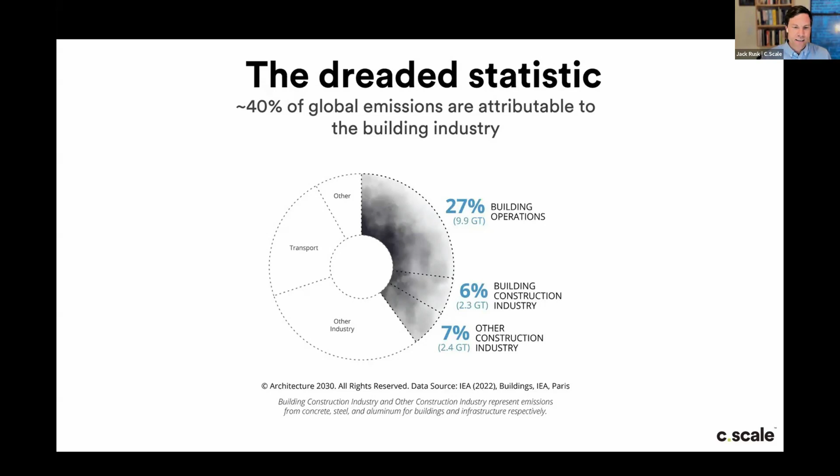And when we look at it, it's just intimidating enough that it's a little hard to approach. What does it mean to take this down to 39%? What can I do? If we're looking for data to drive decisions, these are nice statistics to contextualize what we should focus on. But I argue that maybe statistics like this don't actually help us focus our attention on specific strategies and practices.

Another kind of global statistic that I find really fascinating comes from the UNEP, the global group convened by the UN to look specifically at buildings. And it gives us this other very staggering way of slicing some of the same facts. To reduce emissions from the built environment must happen simultaneously with a growing building stock.

There's all sorts of arguments made, many of which have merit, about building less, about trying to provide for the programmatic requirements of clients with things other than a building. But at the end of the day, it's a little hard to convince a group of architects that they should build less buildings. And that really helps us understand the challenge, which is how do we continue to provide spaces for human thriving, right? While also reducing overall emissions.

And this means that if we're going to build twice as much, say, and reduce emissions to half as much, every building we build, we need to do a little bit better with, especially because not every building is going to get the attention of an architect, least of all one concerned about the environmental impacts of that project.

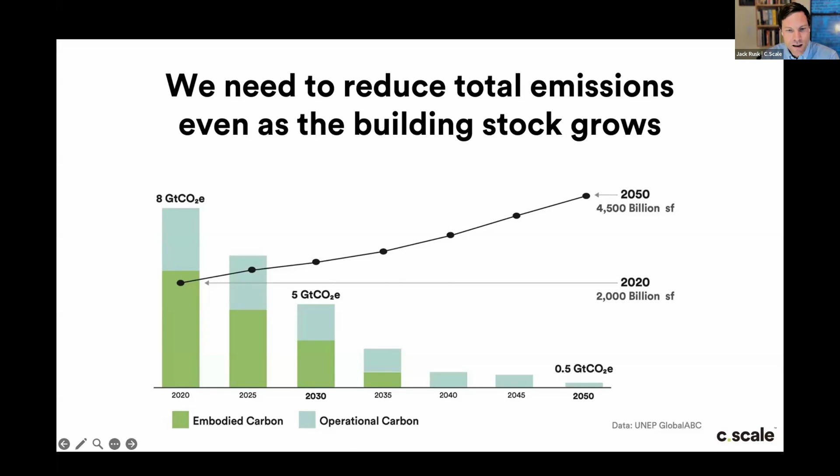Another kind of statistic that sticks out to me in these conversations is this one. This is from a study in, I think, 2020, that the weight of all the stuff moving through the built environment, you see the things here, concrete, aggregate, bricks, masonry, metals and asphalt, now outweighs all life on Earth. It's a strange thing to think about, but it really helps us understand this twin crisis of landscapes and biodiversity together with all the material being processed in the built environment.

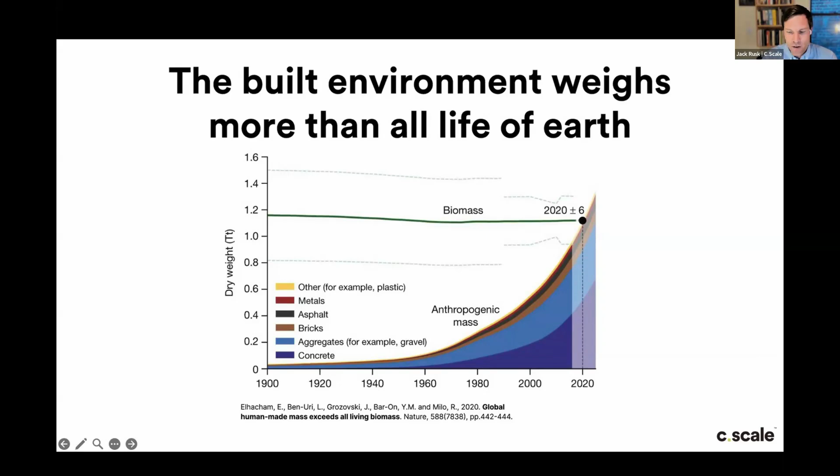And again, another way of slicing the global problem, and one I hope that's a little more palpable to people very aware of the quantities of things like concrete that might go into a building. And all of this obviously is depressing, demoralizing, et cetera, and we could stay up all night feeling bad about it.

But the thing that is really exciting for me at C-Scale, and I think for many folks in the industry, is that designers actually have a very particular and powerful role to play in this whole equation, which is that the procurement spend that comes through architects' hands through things like specifications, which obviously aren't the whole picture, specs get eroded for all sorts of reasons, but really they do move and define markets. And the potential of architects and designers taking climate more seriously is that the immense purchasing power of all those hundreds of small decisions that people make every day has the potential to really do something different.

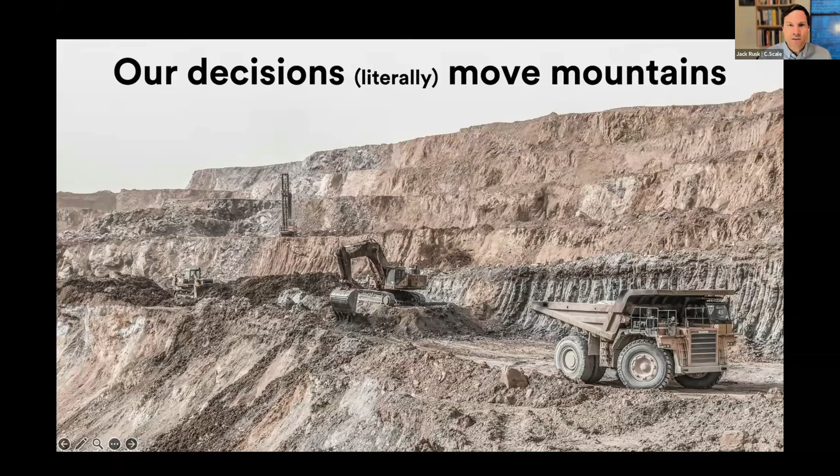On one hand, our decisions move mountains, they contribute to extraction. Some of this is inevitable, and really, I think, a cost worth paying for beautiful and livable cities. But we can also try to make decisions that regenerate forests, that rebuild livelihoods, that repair landscapes. And the trick, obviously, is knowing which decisions contribute to which.

To do that, our work, to bring it home, is life cycle assessment. Life cycle assessment is the tool that helps us tell the difference between things that contribute to environmental well-being and things that degrade it.

And obviously, carbon is only one of many metrics we can look at, and we look to carbon really as an imperfect proxy for a whole host of potential impacts. Like I was mentioning to Paul earlier, we're needing to look at energy use in a building against the procurement of insulation, against the effect that improving the concrete mix might have. And what carbon allows us to do, it has this sort of magic quality, just like currency, of helping us put dissimilar things on a common basis.

And that's why we see carbon assessments as a holistic frame to make these sorts of decisions on building projects, when buildings are many dissimilar materials coming together in complex sequences. To wrangle a lot of that complexity, simplifying assumptions like reducing everything to carbon emissions help us make apples to apples comparisons as we're approaching these decisions.

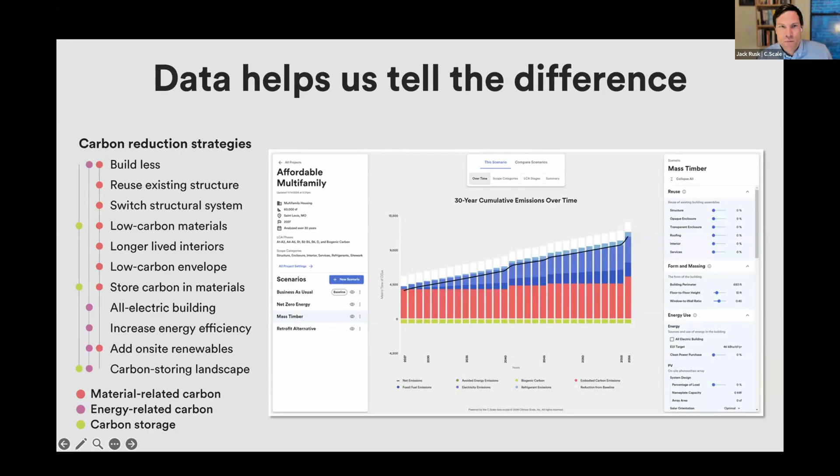This is a project that I worked on in San Francisco a few years ago, a K-12 school, about 100,000 square feet. And this is really the mix between operational and embodied carbon. The grid in California is pretty clean. It's getting cleaner. And we see that most of the emissions from this school are from the embodied emissions. But if I take that school and put it in a crane and swing it over to a couple different cities, we see really different profiles in the distribution of emissions and also the absolute quantity. There's different electricity grids, there's different concrete supply chains. Concrete's an exceptionally regional material, and that changes the balance between operational and embodied carbon.

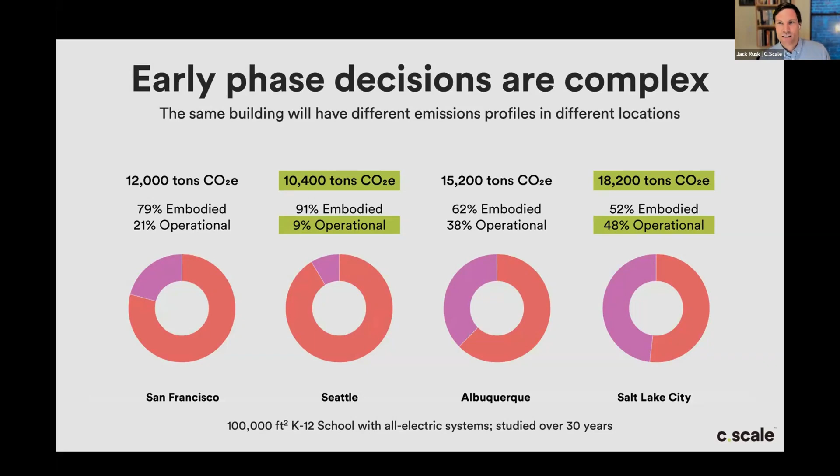And obviously, if you're in one place and you're only doing projects in one town, you might develop a gut feeling for these dynamics. But the reality is that many architects work across geographies, work on many different project types, and need to use data to understand these trade-offs, lest we accidentally make decisions that might be relevant in San Francisco that are not as relevant in a place like Salt Lake.

Another kind of thinking that we hope data helps us avoid is the idea that there might be magic bullet solutions, like the one thing we should always do that works everywhere. So this is continuing that same analogy. Say for that San Francisco school, we put a PV array on it and we get to something that looks like net zero. We generate enough energy in the year to offset all the energy procured from the grid, averaged out over the course of those 12 months.

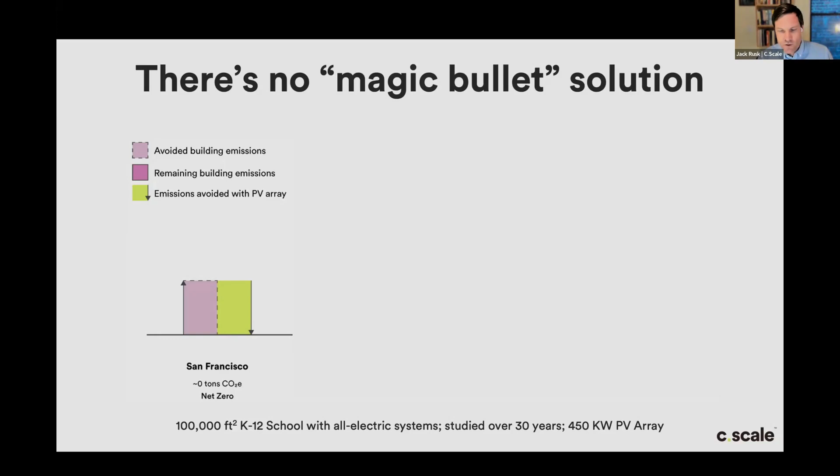Well, if you take again that same PV array and put it in different places, you see really different dynamics. In Seattle, the grid is way cleaner, but PV actually produces much less electricity because it's cloudy all year in Seattle, and we don't get to net zero. In Albuquerque, emissions are much higher, but so is the amount of solar resource. So you get to something that looks like net positive.

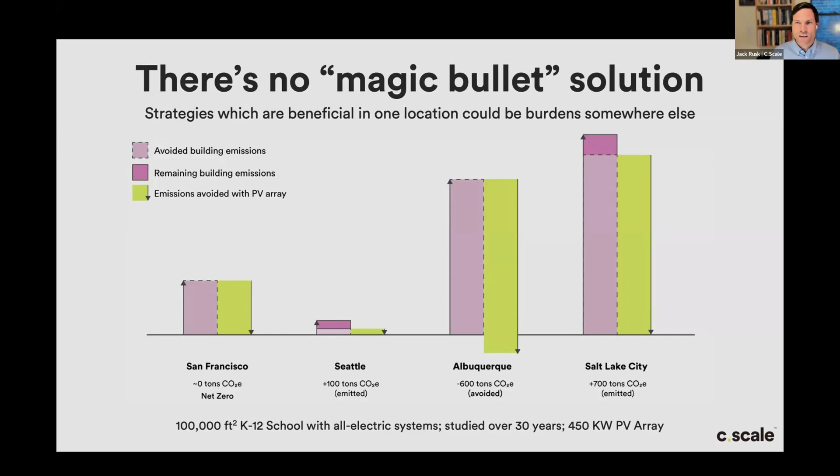And again, these dynamics, which are evident once you start to stack them up and look at the data all together, are not always immediately intuitive. So C-Scale has its roots in the idea of a decision-making tool to help bound out all this complexity, to help project teams focus on solutions that matter. The right data at the right time to support the right decision.

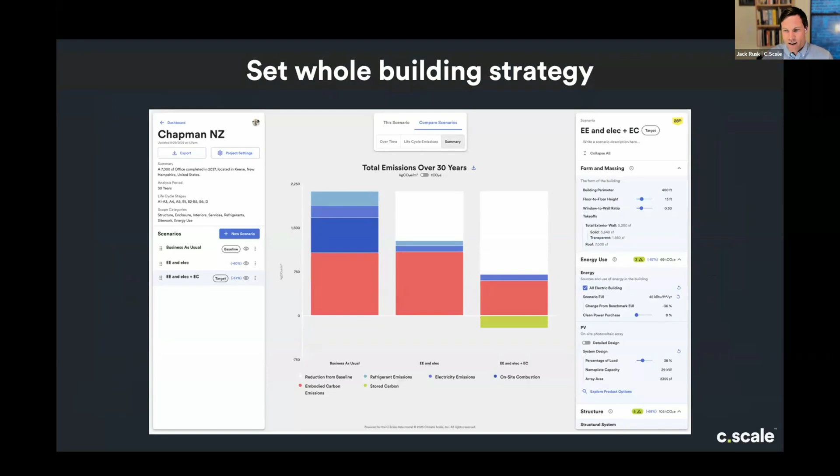And C-Scale's approach here is to use comps, to use models, to use reasonable assumptions to fill in the context earlier, to allow people at the project proposal phase or in early design to make impactful decisions with full context. The idea is that as you design, you are setting the whole building strategy, making the large moves, focusing on enclosure, maybe structure, digging in a little deeper to material procurement, and then configuring assemblies as you figure out the way that some of the assemblies are going to come together.

And then finally selecting materials and using environmental product declarations, which I'll talk more about during the demo, but it really is just an encapsulation of a product's environmental footprint. When we're comparing something like concrete with one mix versus concrete with another, we're using these environmental product declarations to make these distinctions. They really are the way that we understand products and the things people sell into the market as being low carbon or otherwise. This allows us to address the hotspots in design iteratively.

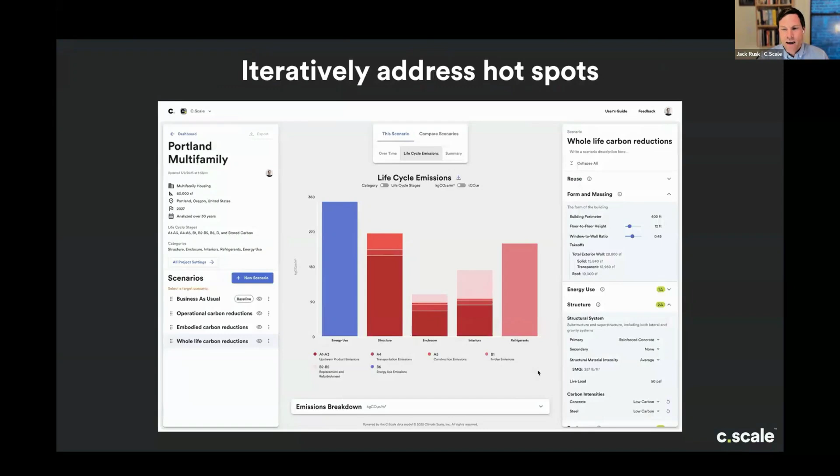And something I'll talk about some today is that this becomes really crucially important when we look at retrofits. Because in retrofits, we have to not only think in a given year, but we have to think over time. Buildings live a long time. And when we're balancing embodied and operational emissions, we're really balancing emissions today, the embodied emissions that are emitted when the building construction happens, with emissions that happen tomorrow as the building operates year over year. So we can look some more at this as well.

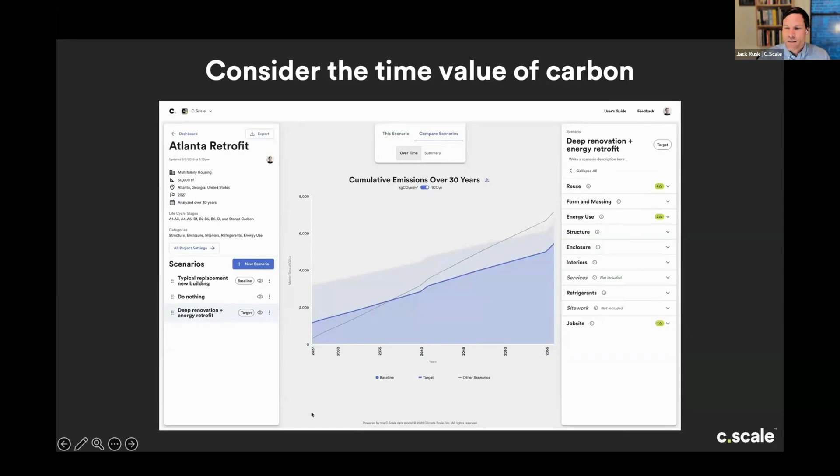Looking at the time, here's a brief case study to walk through that really is some of the early work that we did on C-Scale, back in yesteryear when C-Scale was a project with EHDD, an architecture firm in San Francisco and Seattle. And we were going after the AIA headquarters renovation. Big, brutalist building, right? Can't insulate it very well. Details are difficult. But there's this ambition by the AIA to set this up as a net zero project.

Early in the proposal phase, on day zero, the project team, including myself, used C-Scale to set targets for the project that combined electrification, energy efficiency, a low carbon retrofit with a local carbon offset project where solar PV was installed at Habitat for Humanity projects around Washington, D.C. And to do these installations, we had to know exactly what the last amount of embodied carbon to offset was, which means we needed on day zero of the project to have that number and feel confident in it.

And it's really exciting today to think back on this project because it is finalizing. The opening gala was held, I think, a month and a half ago. And we're finally on the other side of the project, and the final carbon estimate, or the measured as-built carbon emissions, were within 5% of our initial day zero design. And that doesn't mean that C-Scale was exactly precise in estimating it.

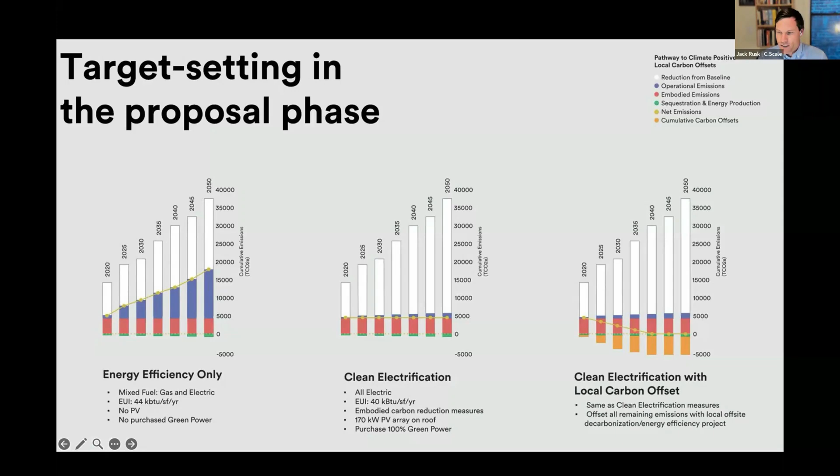It just speaks to the power that having an early target that you can defend with data is what helps you understand where you get at the end of the project, if it's meaningful, if it's correct, if it's within your goals. And this really is, I think, for us, the biggest advantage of setting carbon targets early and iteratively, because they help you understand what the North Star is and what good will look like for that project.

So since then, C-Scale is now a separate company, has no day-to-day relationship with EHDD, and it's still available open access online for anybody to use to go in there and plan projects. There are different parts of it that are subscription based, but our goal is to provide the majority of the functionality for free to everybody, with our goal of getting a carbon assessment done on every project by every firm everywhere.

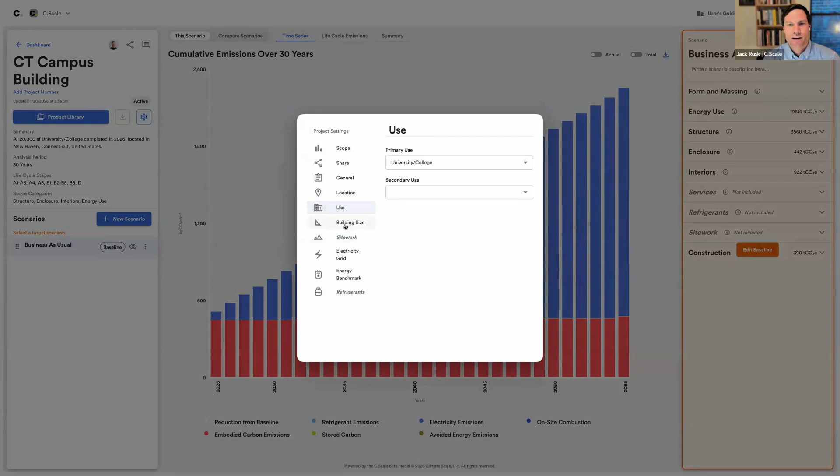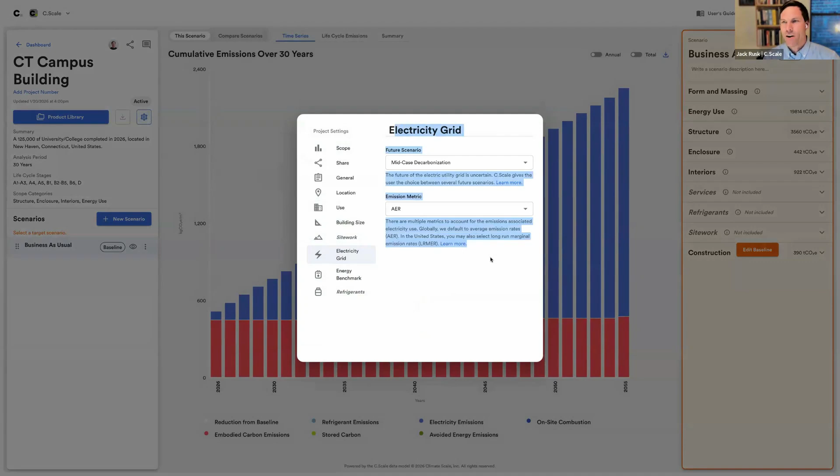Building size, maybe there's below ground floors, like 2 at 5,000 square feet, right? Whatever that is, that'll update the model. We're excluding site work, but we can put it in. This is assumptions about the electricity grid and if, how, and when it will decarbonize in the future. Energy benchmark data as is relevant. And then we do refrigerant modeling, relevant for lab buildings, grocery stores, data centers. But let's just consider it out of scope for this building.

And I can always change that scope here, adding in other scopes to the project. So the idea is you can configure all of these things at the project level, and then really everything else happens here, building scenarios. The first business as usual scenario, we'll call it the baseline. And you have to click in to edit the baseline. The baseline has this extra layer of protection on it, because as we generate other scenarios, they'll give you reductions against the baseline.

So here we can check this. Actually, maybe the floor to floor height is more like 16 feet. And the building is really glassy, so the window wall ratio is something like 0.76, whatever that is. You still sort of update the preliminary takeoffs there. I look at my energy use and maybe my baseline EUI here is 40, whatever that is.

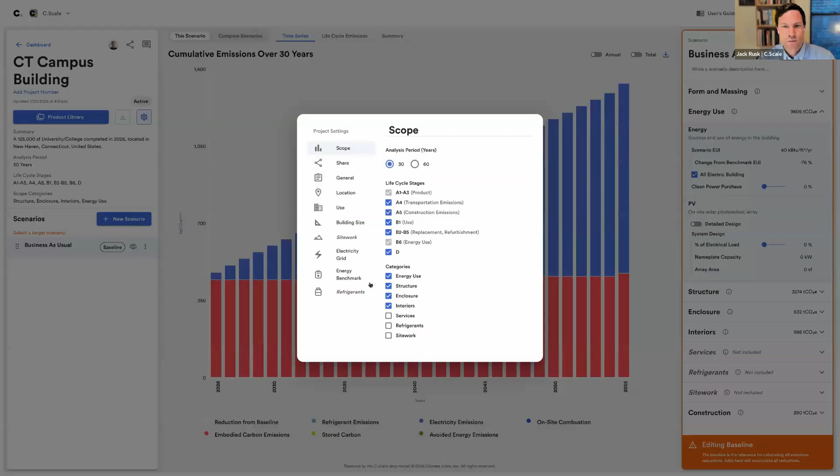You see my benchmark EUI. My benchmark is always going to come from the industry-wide benchmark, which lives at the project level, so that's industry-wide data. So I'll accept this as my baseline. Let's go through some of the graphs. This is cumulative emissions over 30 years. So you see the big spike in year 1 of embodied emissions and the slow accrual of emissions over time.

If I change this from an all-electric to a mixed fuel building, you see 2 kinds of emissions, both the on-site combustion and the electricity emissions. Maybe we'll have a mixed fuel baseline. What I was saying earlier, this is one way of looking at it, where we look at the 30th year, and operational emissions are the largest overall cumulative contributor.

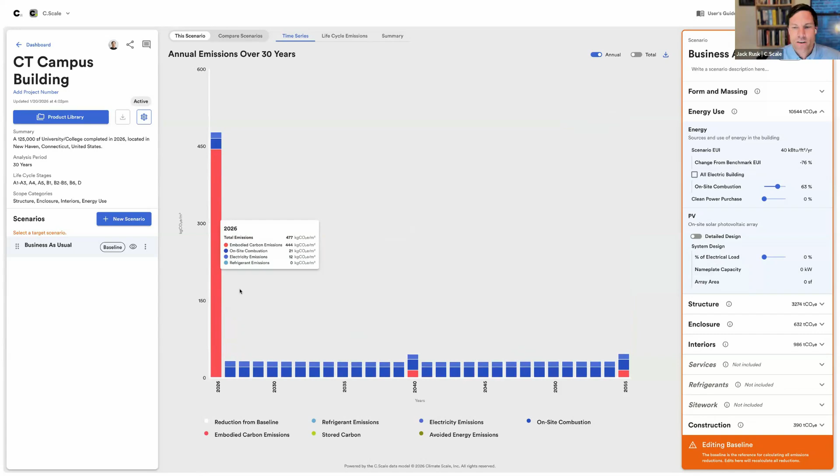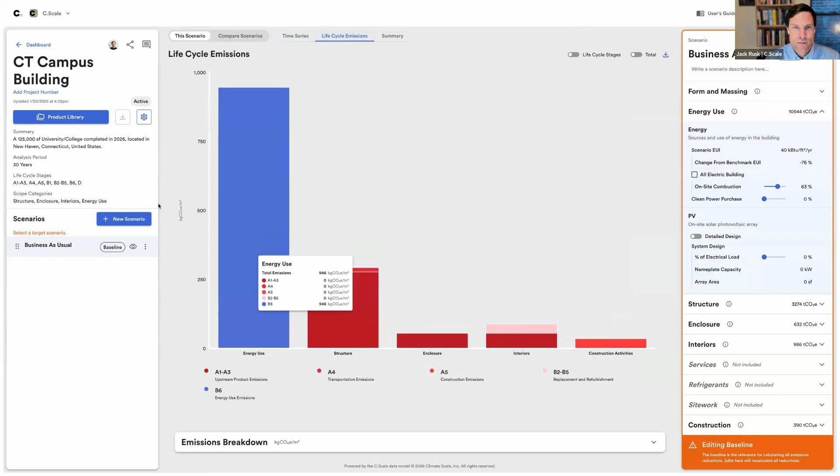If I look at the data annually, we see a very different story, right? That the biggest single emission spike is the embodied emissions in the first year. So there's this trade-off, lots of emissions up front or little emissions slowly accruing over time. We'll start to look at that. You can break these emissions down by the contributors: energy, structure, enclosure, interiors, construction activities, maybe no surprises there. And you can summarize the data into some large chunks and even start to benchmark your building against the Carbon Leadership Forum. So that's the general orientation.

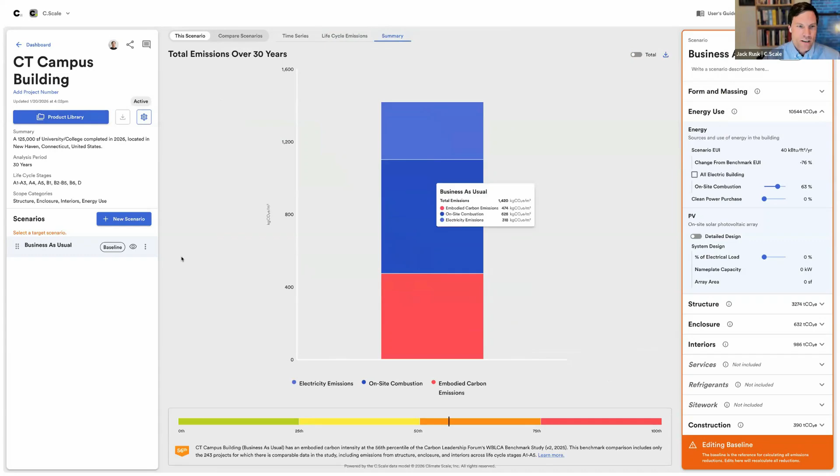Maybe we'll build a scenario. The first scenario, I'll just call energy efficiency. It'll copy the baseline and make a new scenario. And I'll reduce this EUI to something like 20, a very low EUI. You start to see what that reduction looks like. And heck, maybe here too.

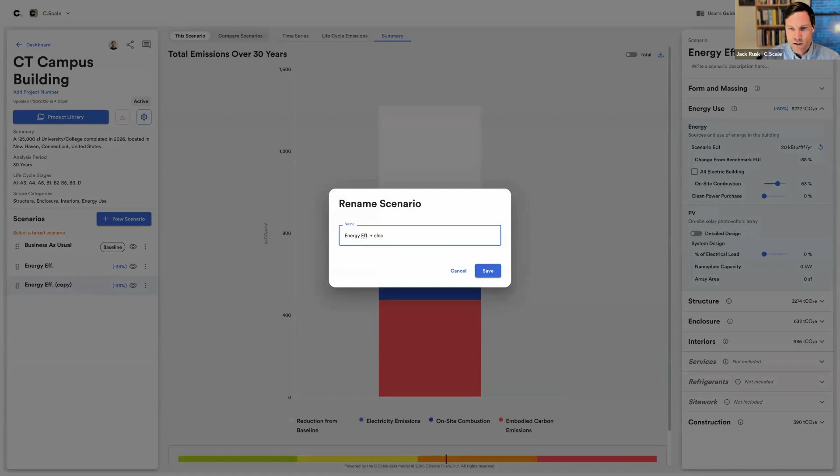Actually, I'll make another scenario now. I'll duplicate this one, and I'll call this one energy efficiency plus electrification. And for this scenario, I'll also check the electrification button. And I can start to compare them on the Compare Scenarios tab in different ways. But you can see here this progressive reduction in emissions with each scenario.

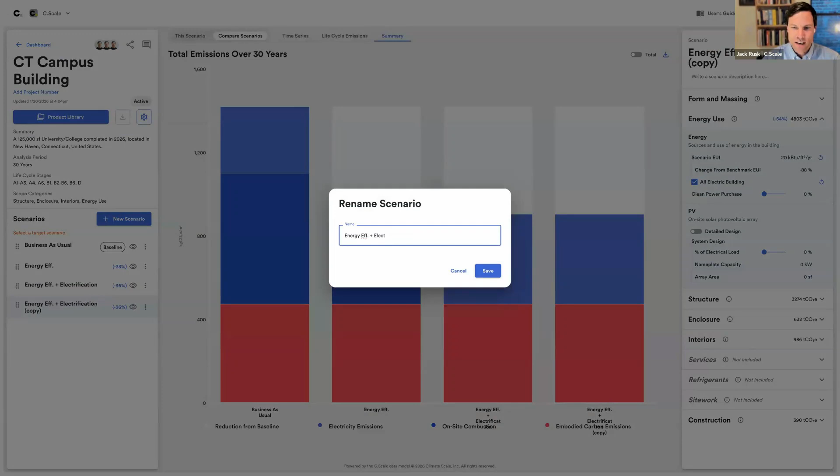And maybe I'll make another scenario by continuing to duplicate these down. And I'll call this one energy efficiency plus electrification plus PV. And I'll put a PV around this building that generates, whatever it is, 50% of the total electrical load. And that gives me this new scenario. It tells me the area of this array is around 22,000 square feet.

That's great. Maybe I have checked with an engineer, I've looked at the site, and there are massing reasons why I'm going to angle this a little differently. So the azimuth, 180 degrees is south. Maybe this is going to be a little bit to the west, so I'll put this at 230 degrees. Everything else will resize accordingly based on production at that orientation. So you can do really easy mock-ups of these initial scenarios.

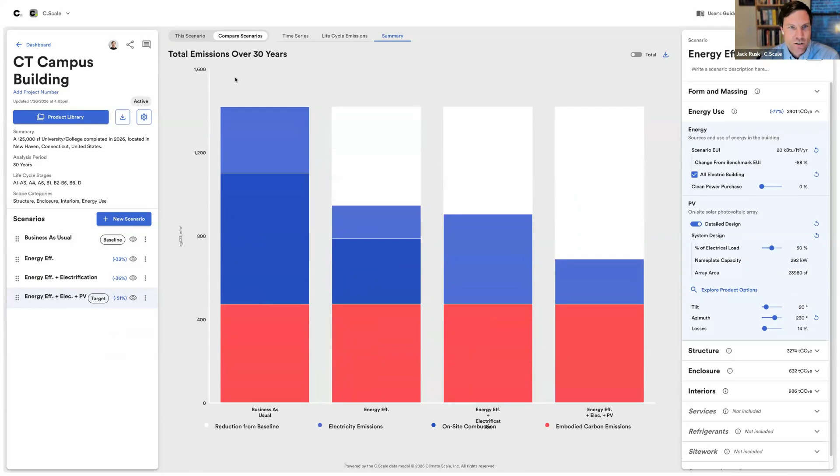And I'll mark this as the target. And it gives me now this first suite of scenarios that has really only been focused on operational energy. But we see this pattern emerge where, as we've done the commonplace measures, as you mentioned, Paul, to reduce operational carbon, with more efficient buildings, electrification, sprinkling of PV panels, we see this very clear signal that everything else we have to address here is going to be embodied carbon.

Andrew, I saw you turn your camera on. Was there something you wanted to jump in with? I had a quick question. Please. Well, whenever you toggle the PV array on, it seems like there would be an addition to the embodied carbon in the building, but maybe that's so small that it's practically negligible, or is that not in the platform? No. You're really onto something.

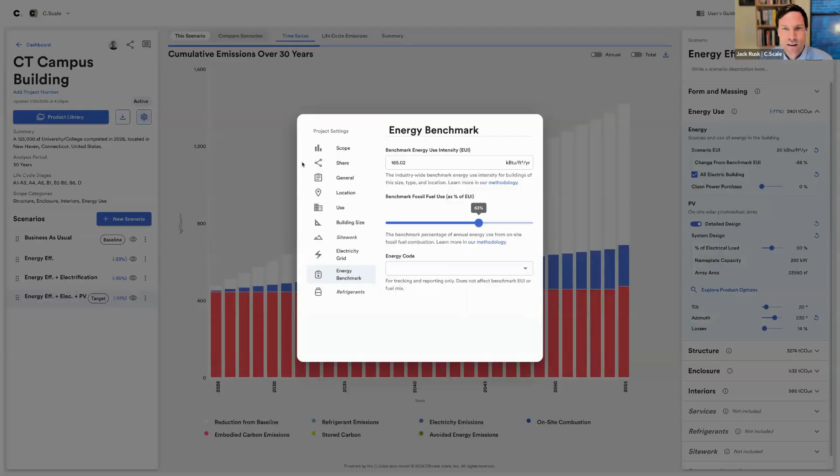So this is a scope issue actually, because when we go back to the scope, we're only including structure, enclosure, and interior. So let's turn on services, MEP, et cetera. So we turn on services. Okay, it'll take a second. It has to recalculate all of these with the new scope. And then we can start to see if in 30 years the PV pays itself off for this scenario.

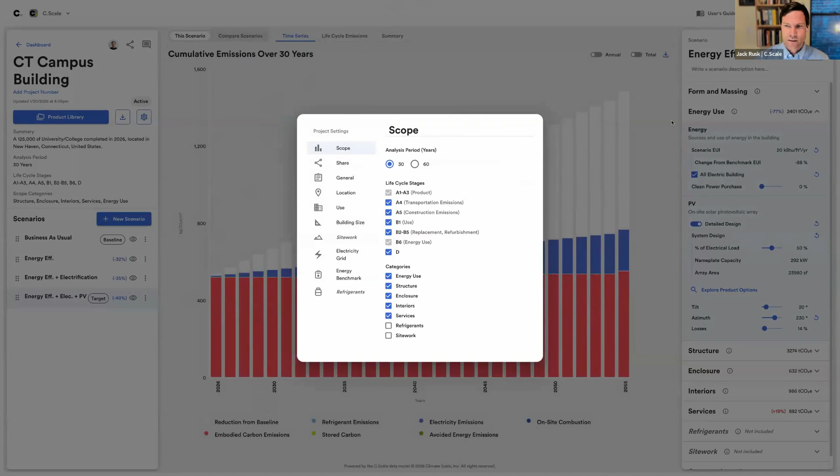But you will find for sure, if you're in a place like Seattle where the grid is very clean and the electricity that's piped in by the utility is already looking pretty good, the PV trade-off is a little different. And this is where we need to sort of put an asterisk. You see the same thing with insulation sometimes: sometimes triple glazing isn't worth it from a carbon perspective, but it's still worth it from a comfort perspective, or from a better detailing or moisture management perspective.

And there might be places where PV doesn't pencil out from a carbon angle, but it's still meaningful because, hey, maybe it provides resilience or these other benefits. So sometimes people say my PV array isn't doing exactly what I thought it would do. And that's where we need to politely lay out the realities of these trade-offs that exist. But great point.

Good, thank you. Okay, cool. So with this set, Paul, the stage is set to move past what you've been working on so far. Sorry to use you as a shill in the audience, but I think you teed it up pretty well.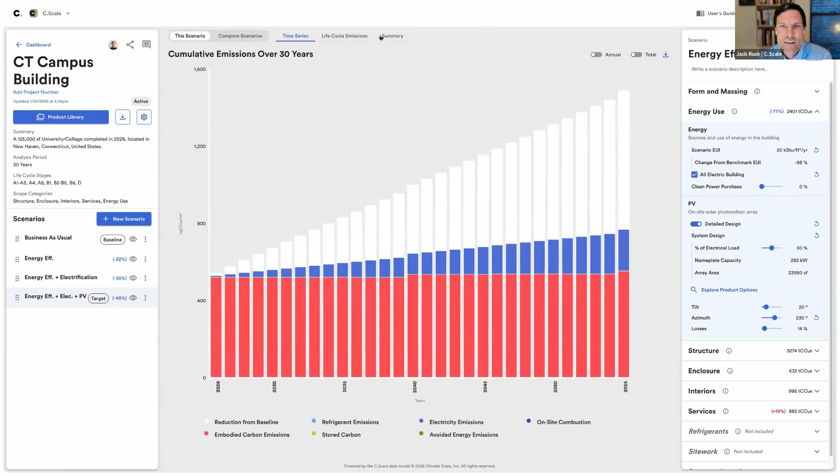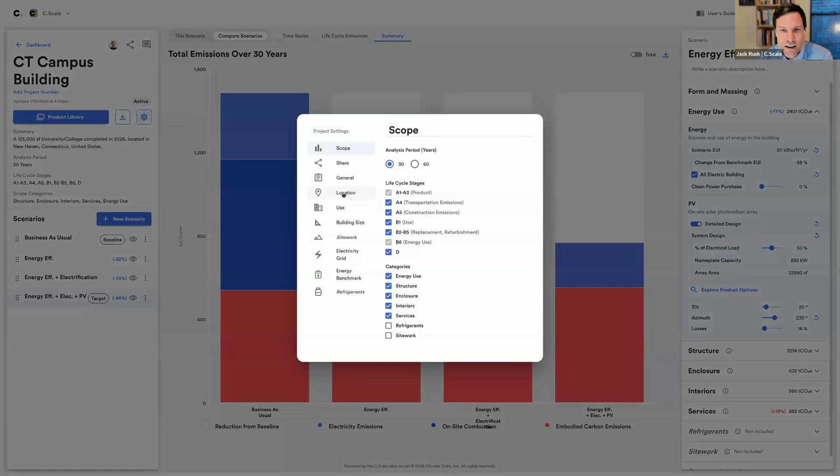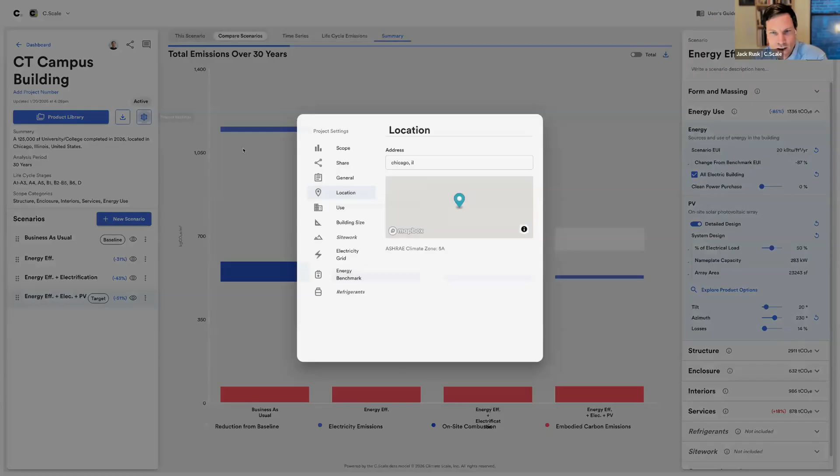Moving beyond what people are used to and looking at more of the embodied emissions. So if I go back to this scenario, and as another fun thing, let's stick around on the comparison. This gets to what I was talking about earlier. If I go to project settings, I know that Pickard Chilton has some big Chicago projects. If I move this same project to Chicago and it recalculates, I hope you can see this is a different orientation of all the numbers. Savings are larger from electrification; PV, at 50%, is a smaller number. You start to see the way geography affects what we see.

But we'll move back to New Haven, just to note that all of the data in that presentation comes straight out of the tool. Let's see if I can plug this in a way that it likes. Okay, now I have to wait for it to reload again, sorry. Okay, we're back.

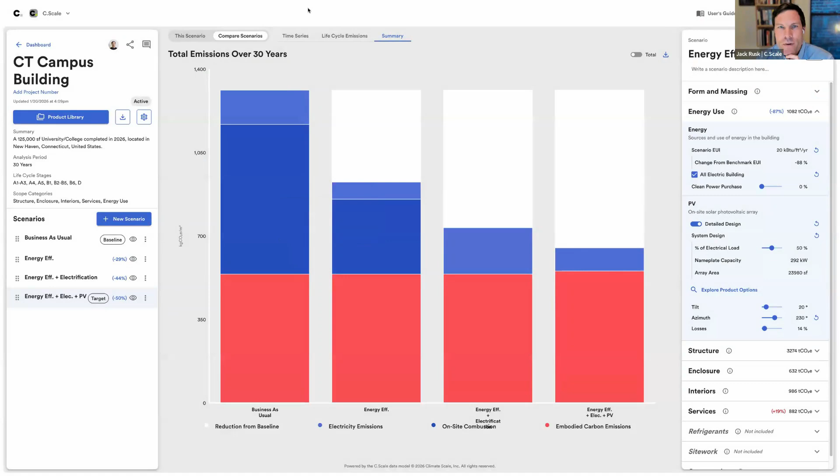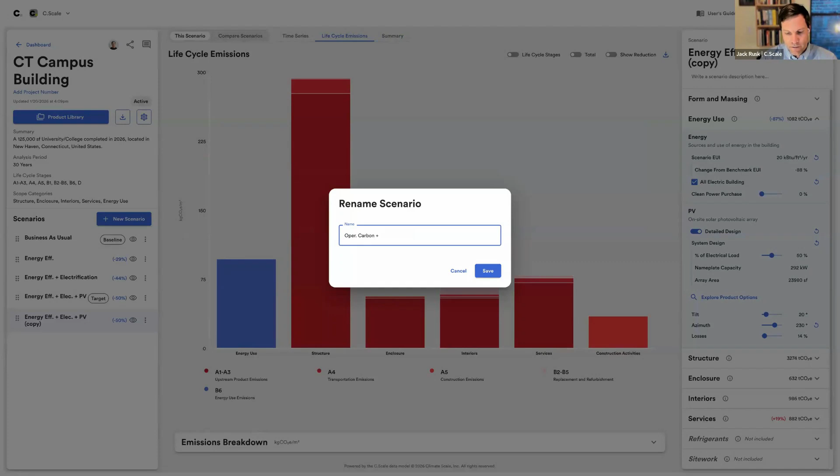So from here, if we look at this scenario and the life cycle emissions, we see that all of a sudden energy use is not the largest contributor, structure is. So I'll make a new scenario, again just copying it down. I'll duplicate this and call it operational carbon plus embodied. And I can start to layer in some low carbon design strategies. So I'll start with structure. We use statistical models; that's a whole other presentation. You might have seen me give some of that, Andrew, at the AIA conference.

But I'll talk through the results here as we look at things like structural efficiency and say that we're going to be relatively more structurally efficient. That will reduce the carbon emissions. We can procure lower carbon materials, and this starts to lower that number. You didn't see it maybe when it was scaled, but now we can see that just those three choices, lower carbon procurement, a more efficient structure, give a meaningful reduction.

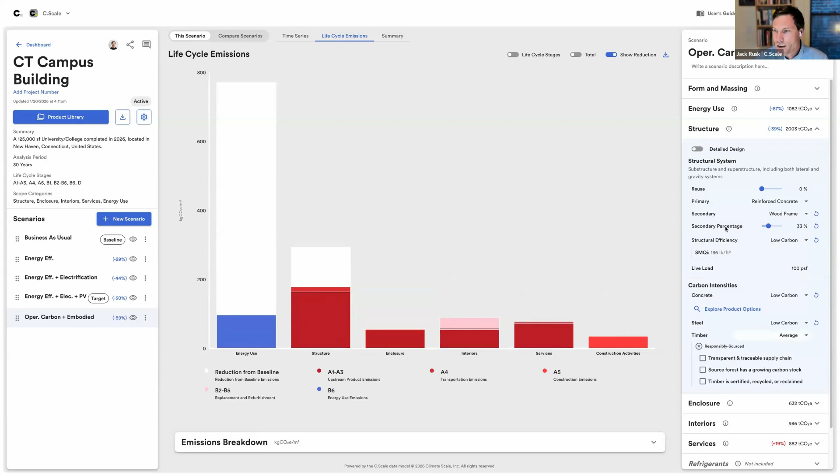Maybe instead of being reinforced concrete, since I model this as a 3-floor building, let's see if we can use wood frame for 33% of the building, maybe just the top floor. And you start to see that reduce, we're at 39% now. Really what we're doing is chipping away at the emissions, one thing after the other. Because now I have a wood structural system in play, I can claim responsible sourcing for that timber, and we start to see the stored carbon in that timber show up as well.

If you do mass timber, this will obviously be a bigger number. But this really is getting at some of these dynamics with trade-offs between all these systems. So if you want the raw data, you can look at this chart down here to understand the trade-offs and differences. All of these, again, are versus the baseline, these percentages.

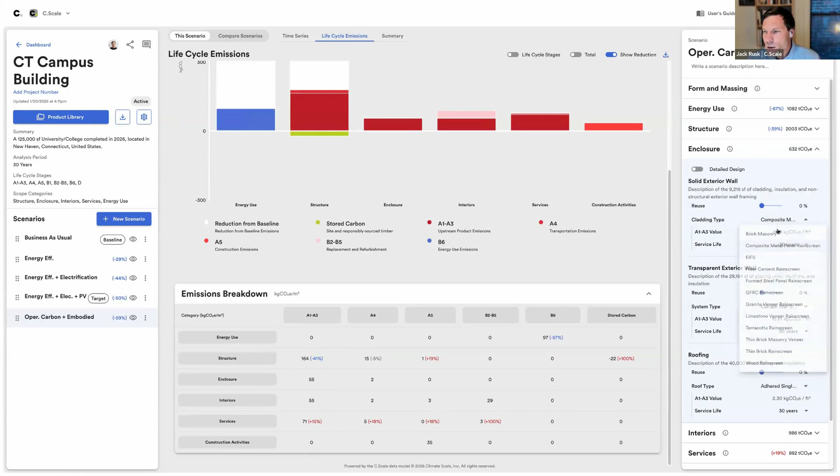And then from that structure, I might look at enclosure, which is where architects spend a lot of time. And I can say that this composite metal panel has this carbon intensity. Maybe I actually want to try out EIFS, always a popular choice. And you see that it has a lower A1 to A3 carbon intensity. Well, one good reason to feel good about EIFS, just kidding.

There's these things you can start to get at, right? The way these materials affect each other. Maybe it's a curtain wall system, maybe it's a window. And this again is really high level modeling. You see these service lives too.

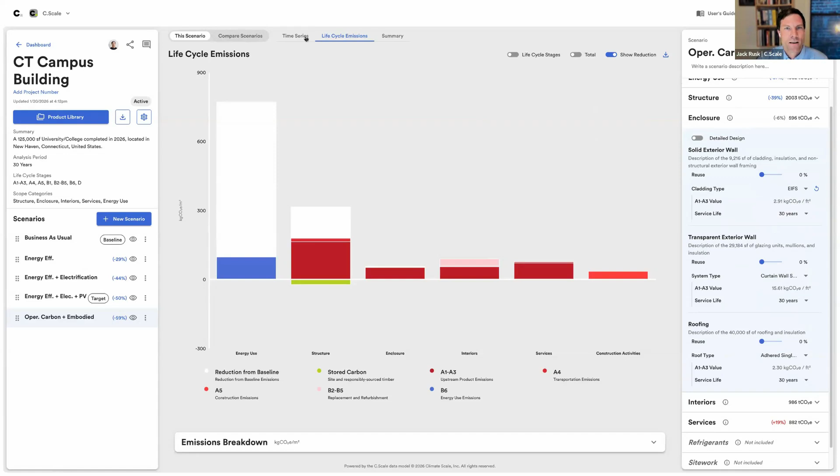If I go actually to just the time series, you see these little bumps that happen as the emissions change. Maybe this is a more durable assembly, 50 years, and you see that the bump will start to change in turn as these emissions happen in different years, which is especially true for commercial interiors projects where sometimes the service year is very short. And you have many bumps over time as the emissions from these replacements of materials occur, right, many times in a 30 or 60-year period.

But that's the high level design. We can dig a little deeper by going into detailed design. That opens this other more complex panel. And this really is where you can dive in. Okay, this EIFS assembly is made out of these materials. If I change this to something else, like a thin brick rain screen, you see it'll recalculate all of the materials coming into that.

And if I say, well, I don't typically use this or that, you can break open one of these assemblies and you can start to edit the aspects of any particular part of this assembly. Maybe this insulation, you're going to count elsewhere, so you can remove that. Maybe you want to add a new entry with a new kind of assembly. You can change the total quantity in meters squared. You can change, for any one of these, the quantity per area of assembly.

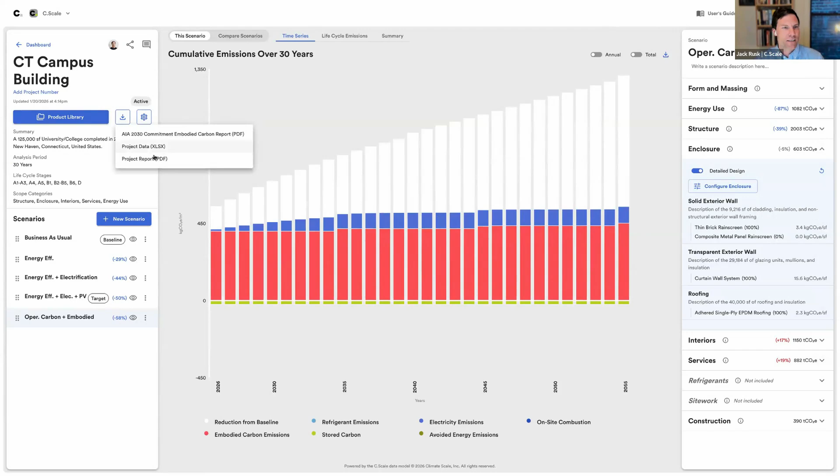So that's a lot of the modeling you can do. You can export any number of reports from this: a PDF, for reporting to the DDx, which a bunch of folks are doing right now with C.Scale, the raw project data as Excel.

And then crucially, all of these projects you build one at a time get rolled up into these portfolios. Here's kind of a random one that takes all of the individual projects and starts to help you benchmark across them, figure out what the hotspots are. And this is a fun one that we were working on with Architecture 2030, which helps us understand again that the operational emissions are not the same thing as EUI.

So if I sort this by EUI, we see these high EUI buildings that are exceptionally low emissions. This is because Vancouver has a very clean grid, and also because things like a clean power purchase will affect this, together with these projects that have a higher, maybe we'll say, operational emissions, but a lower EUI.

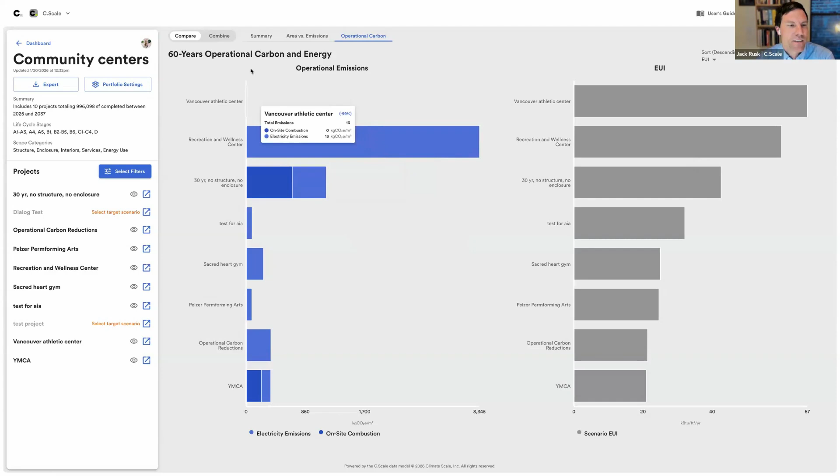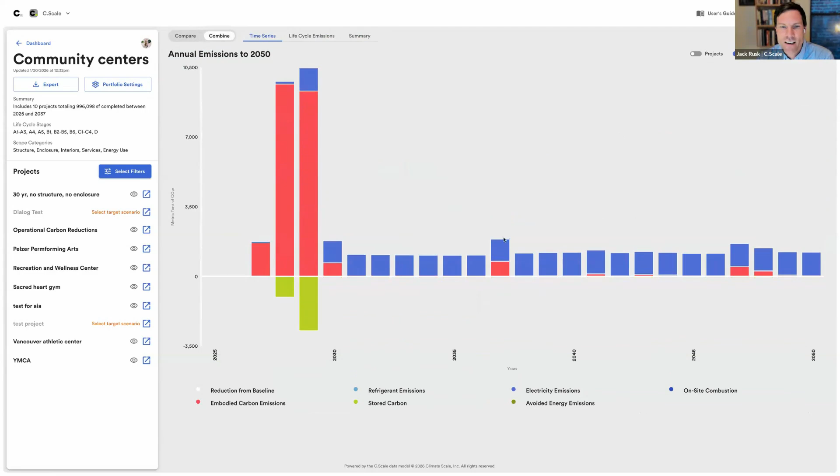So helping firms understand the differences in these patterns across their portfolio. This is a kind of graphic we've been working on with campuses, which is understanding cumulative emissions across things. So I can look at this annually, and you can start to see when projects happen, different things come online. If I change the emissions view to projects, you can see which project is occurring in which year.

And this really is, again, that while maybe people are modeling specific projects, firms and clients are looking at campuses, they're looking at groups of buildings, they're weighing strategies across buildings, trying to understand where the biggest reductions are to be had.